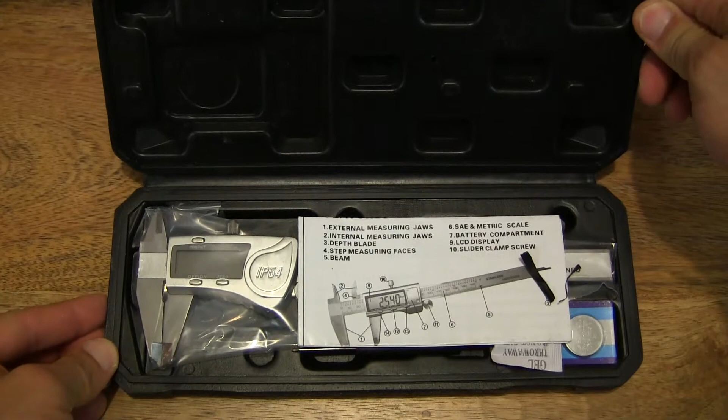So let's go ahead and open up the case. As you can see, the digital caliper comes in a hard carry case. Let's go ahead and open it up and remove the contents from the case.

Okay, so that's the contents of the case emptied out and laid out on the tabletop right here. So let's start off with this. There is a user manual for the Oria Digital Caliper.

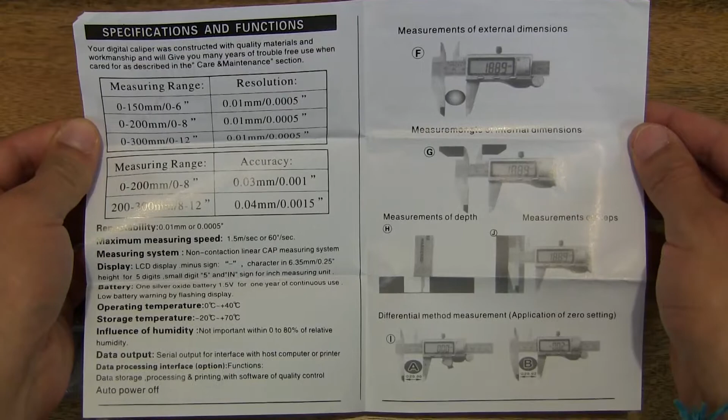Okay, we can now set the user manual to one side, and of course there is a packet of desiccant or silica gel to keep the contents dry. Make sure you put that away safely and keep that away from young children. And there is a packet of CR2032 battery to power the digital caliper, and there is a mini screwdriver as well with a Phillips head.

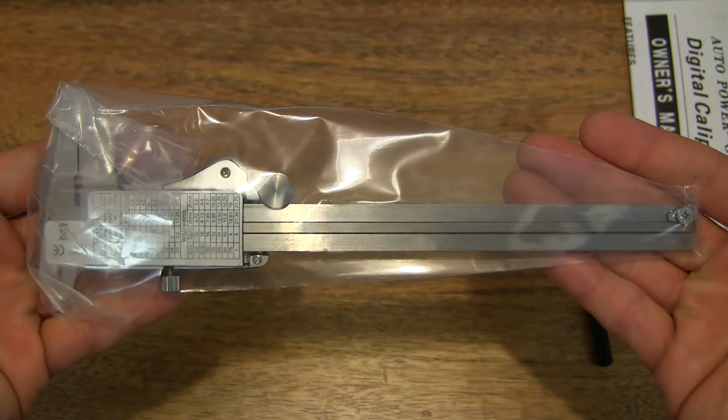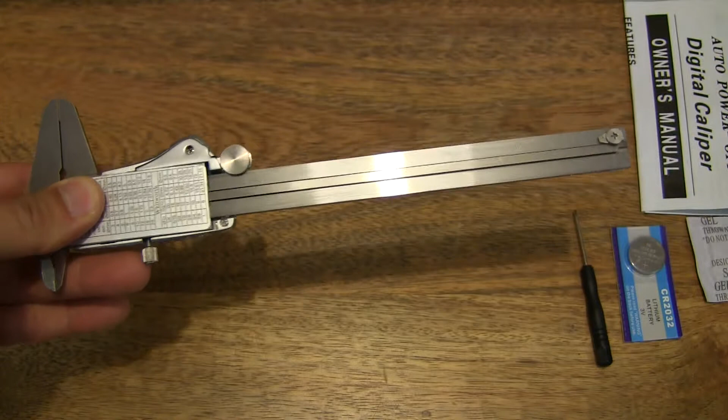Okay, let's set that down. And of course we do have the digital caliper itself, and it is quite a solid piece of equipment here. Let's go ahead and remove it from its protective plastic wrapper, and then we can take a close-up look at it.

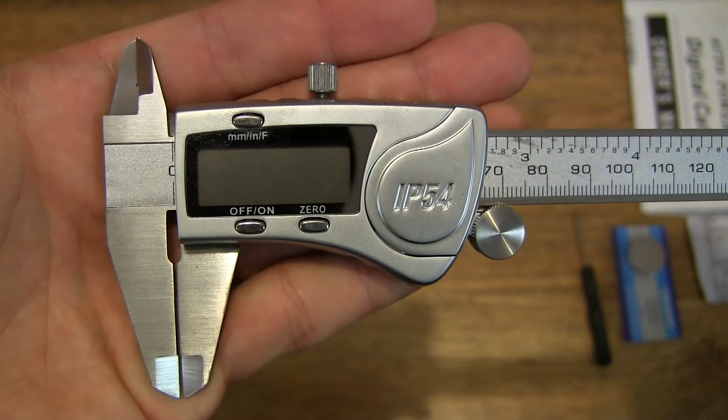So it does have a solid metal construction, nice and hefty, and there is an LCD, as you can see, and there are 3 push buttons on it. And it's nice to see that there is already a battery fitted into the unit.

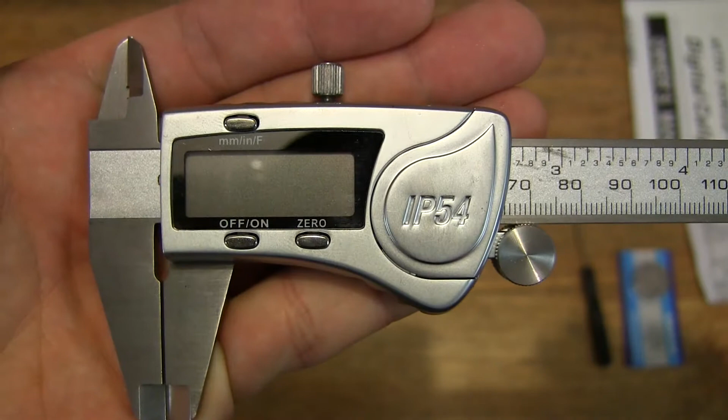So the battery that we saw is a backup or spare. So simple on off right there, zeroing, and the top toggles the measurement unit. So it does fractions in inches, millimeters, and inches.

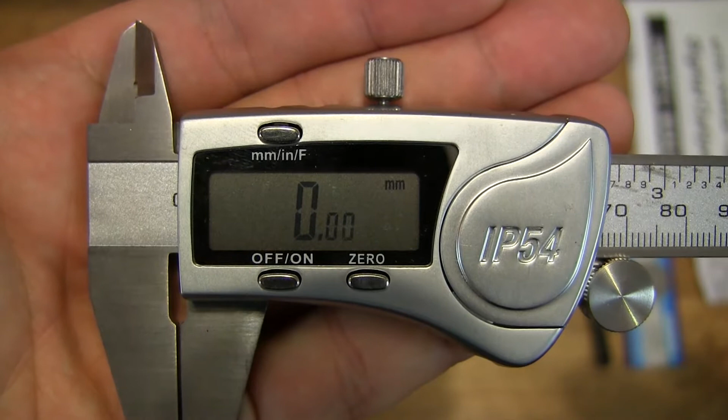Okay, let me bring it up closer so you might be able to see it a bit more clearly right there. So this is the millimeter measurement, inches, and fraction in inches.

Okay, so I've set it back to the millimeter measurement. And then just to show you the rest of the length of the digital caliper. So a nice clear display, easy to use buttons, on off, and of course zeroing.

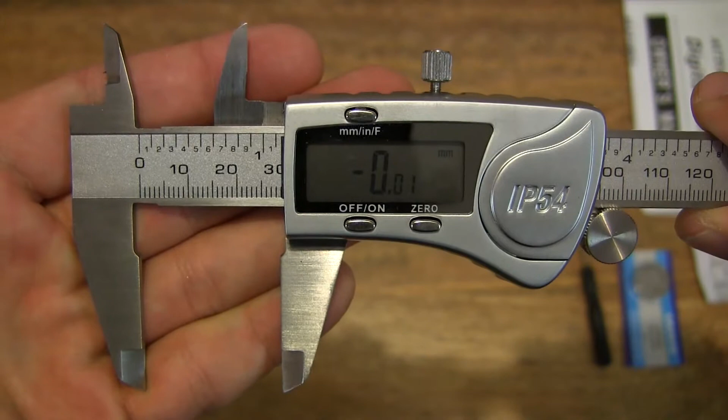Zeroing just resets basically the display, of course I have to undo the locking screw, making sure that it is released, and then we can reset the display at any point, which is quite good because you can always use it to measure differences as well in terms of width and thickness.

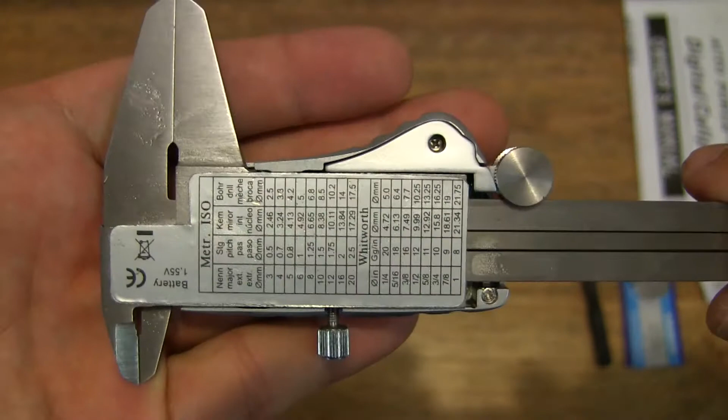But let's just do it the normal way for now. Set it all the way back and then zeroing the measurement. And on the reverse side of the digital scale or digital caliper, and of course over here, there is some more measurement information.

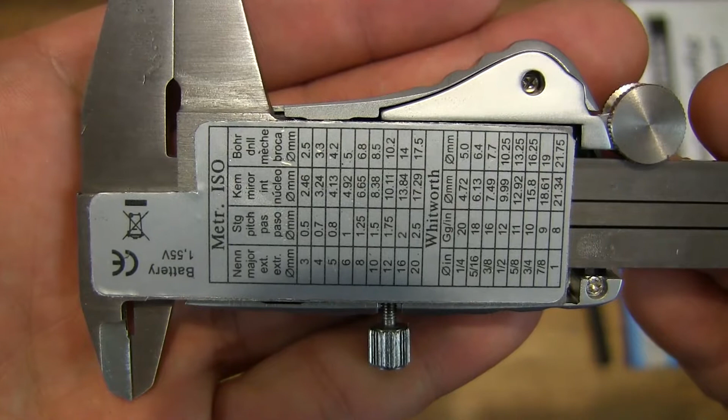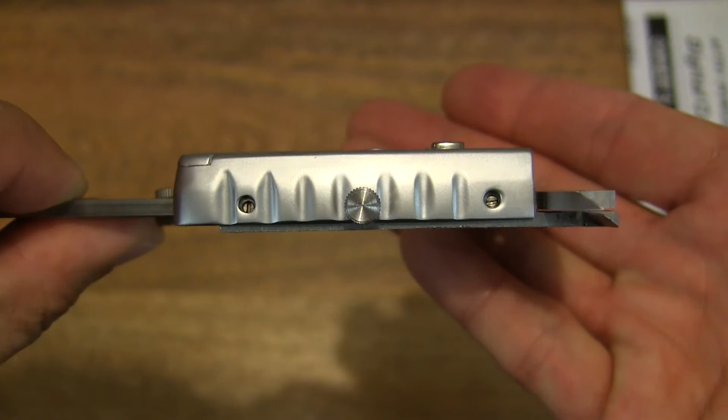And just to show you the thickness of the unit as well. So you can see it is very solid in construction, and it does have an IP rating stamped into the body of the digital caliper, IP54. So there is some level of waterproofing and dustproofing.

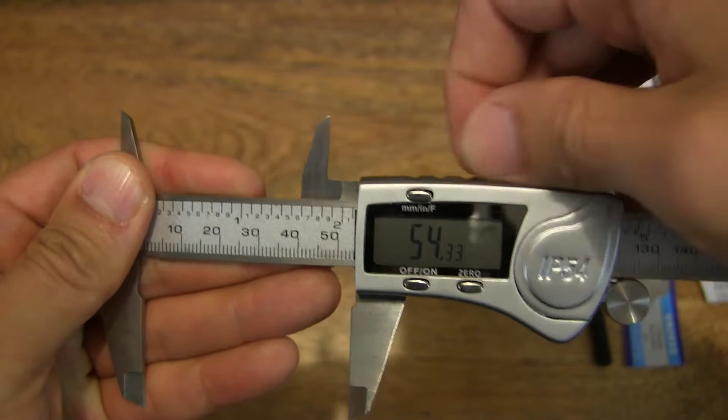And as I've shown you at the top, this is the locking screw or retaining screw or retaining thumb screw, just to fix the jaws or the position of your caliper so that it doesn't affect the reading that you've just taken. Okay, simple lock and release, clockwise and counterclockwise.

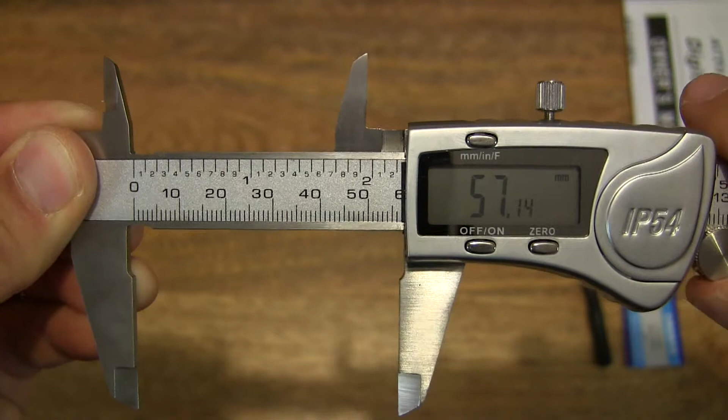And of course this wheel here is for very fine adjustments to move the caliper up or down the scale without having to do it the very kind of heavy-handed way. So yep, for very delicate adjustments right there.

And let's open it all the way out. So let's close it in, zero it, and then flip all the way out so it does lock at the end. No fear of it popping out of its ruler right there.

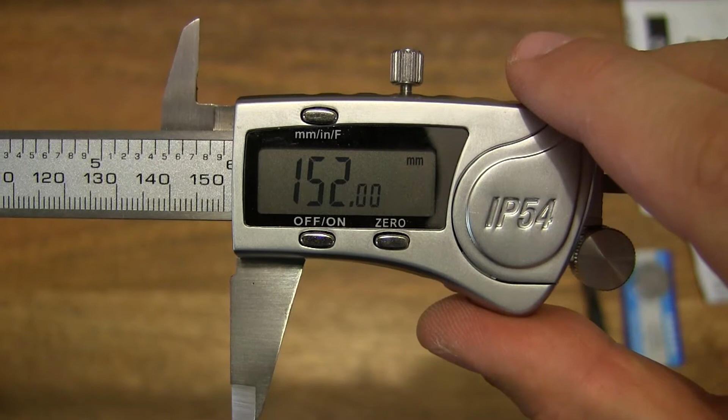And it displays 152 millimeters, and it measures down to the hundredths. So that's 15.2 centimeters in maximum measurement there.

Okay, so now I suppose let's go ahead and do some measurements. So I do have some items lying around, so let's go ahead and measure them. So here we have two notes, 15 pounds altogether, a 10-pound note, and the very newly issued 5-pound note, which is a plastic note that's replaced the paper note. So altogether, 15 pounds, and that's my whole life savings, so I have to be very careful with it.

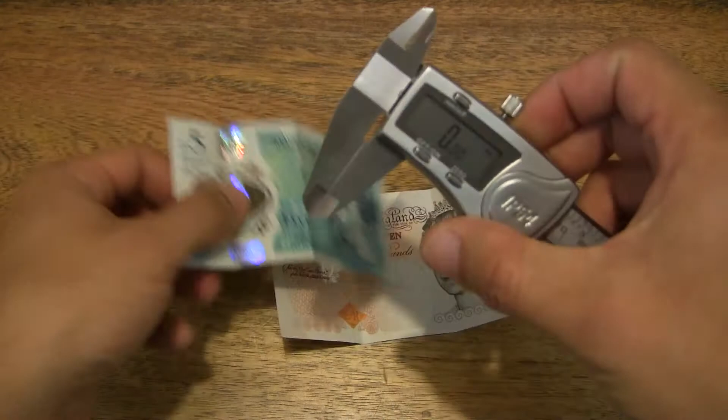So let's go ahead and see if we can measure the thickness of the notes. It's a big question mark, I'm not even sure, but let's give it a try. So it does measure the thickness. As you can see, it is 0.11 millimeters thick.

I've just pushed the wheel right up against the note, so it is at its maximum travel there against the note, and locking the thumb screw down right there sets the jaws in place, so no need to keep the hold on the wheel anymore.

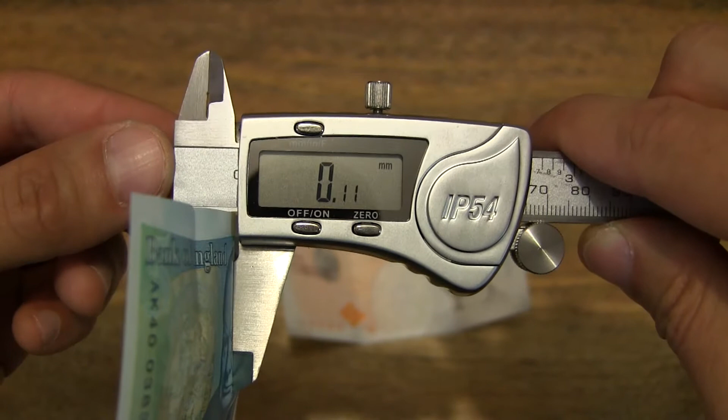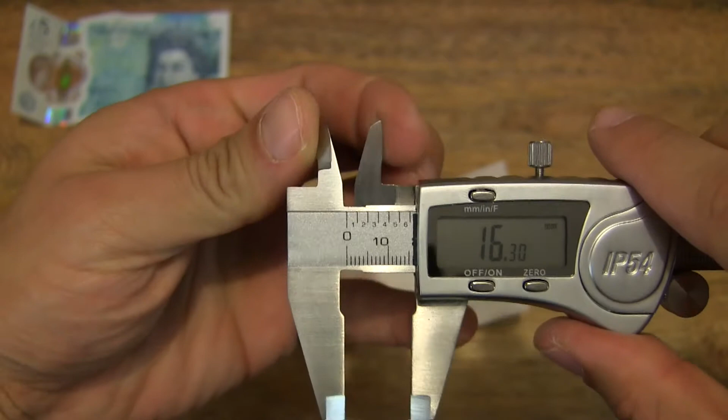Okay, so 0.11. Unfortunately, I don't have the old paper 5-pound note, so I can't compare the thickness, but let's go ahead and release the retaining screw or thumb screw and release the external jaws. And I have to mention, these are the external measurement jaws and those for internal widths or thickness measurements. So internal jaws and external jaws.

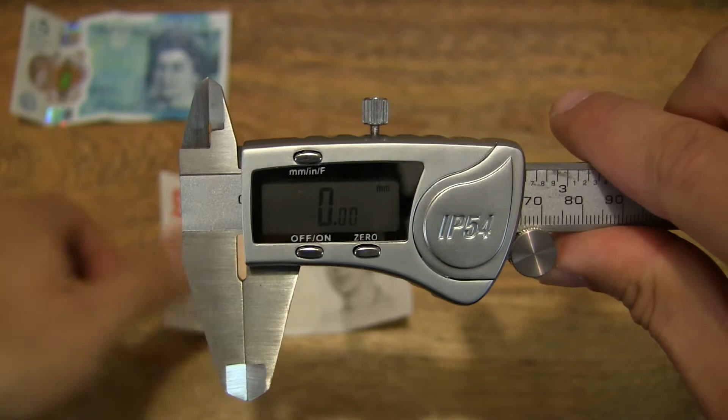Now let's go ahead and measure the 10-pound note, but before we do that, let's just make sure that it does show at 0 with the jaws fully closed. Now let's go ahead and open it up again. So 10-pound note, place it right there, and roll the wheel along. And as you can see, pushed right up against it, and with the same measurement as well.

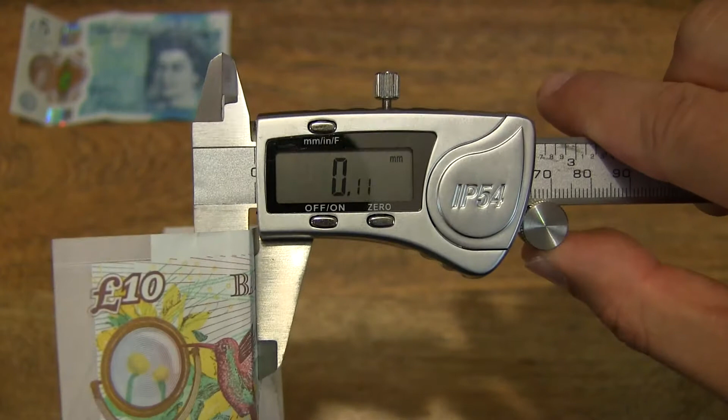So 0.11 millimeters thick.

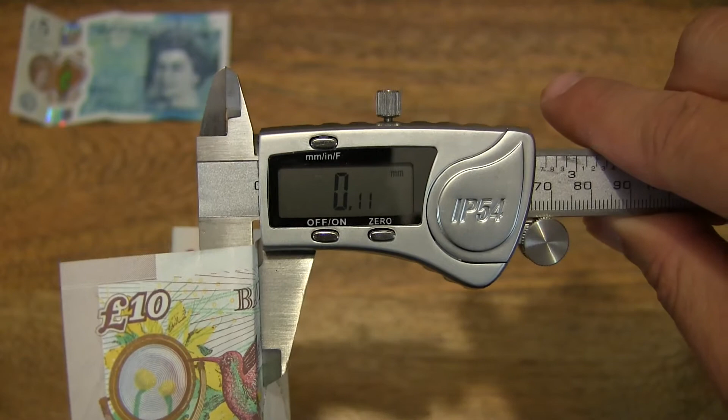Okay, very cool. Release and release. Now let's measure some other items very quickly. Over here I have a bunch of NATO and Zulu watch straps, and of course I have my trusty Tudor Submariner Snowflake MN Marine Nationale reference 7016/0.

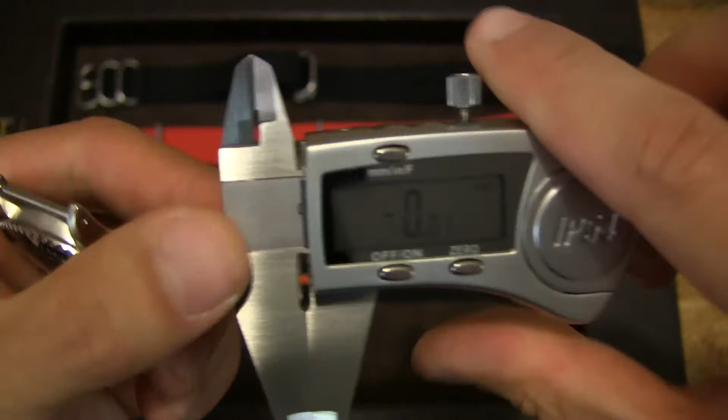With the digital caliper we can measure - let me just reset the measurement there. We can use the internal jaws at the top to measure the lug width between the lugs. So we simply make sure it is zeroed by pressing the zero button.

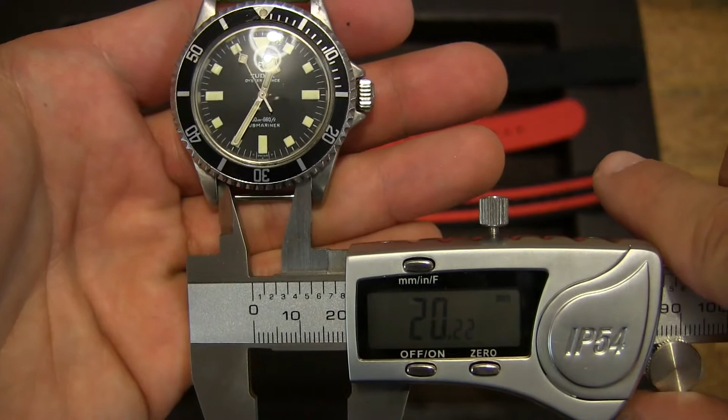Then we want to move it along just enough to measure the lug width between the lugs right there. I'm just going to rest it gently on the spring bar and then roll the wheel along, trying to keep the LCD in view at the same time. A bit of a juggling act for me, but just bear with me. I do have to be slightly delicate about this. Okay, and there we go. The measurement shows 20.22 millimeters.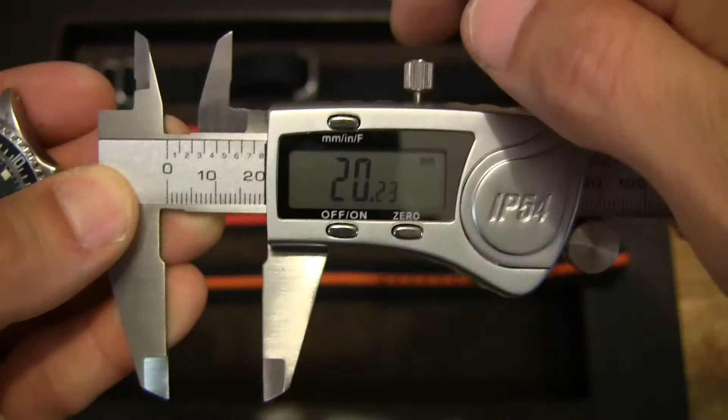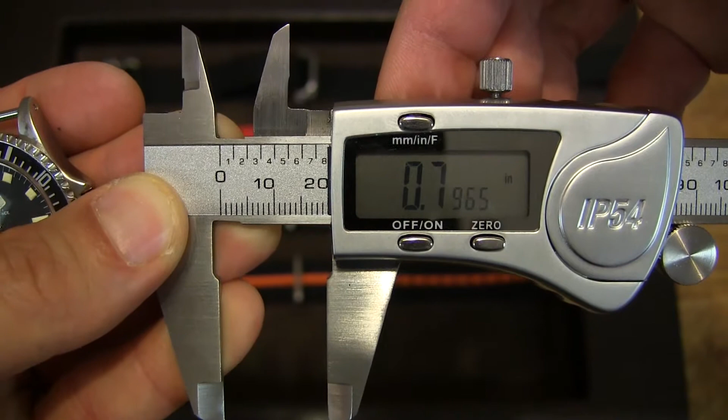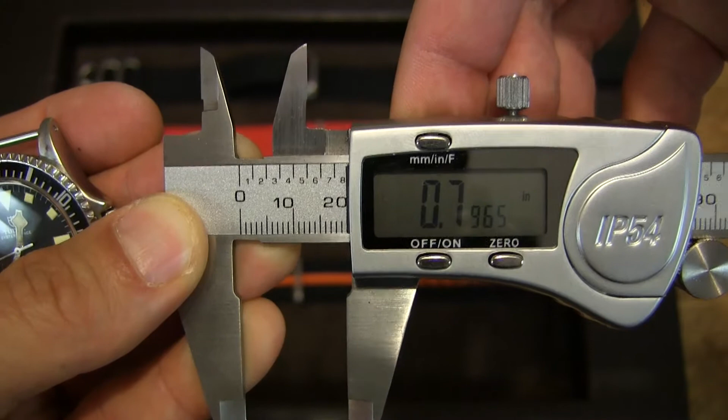If we need to change the measurement - of course I should have locked that down before, but that's just fine. If we need to toggle the measurement unit, just press the top button right there, and that toggles the different units: inches in fractions, back to millimeters, and then inches. So 3 different types of measurement units.

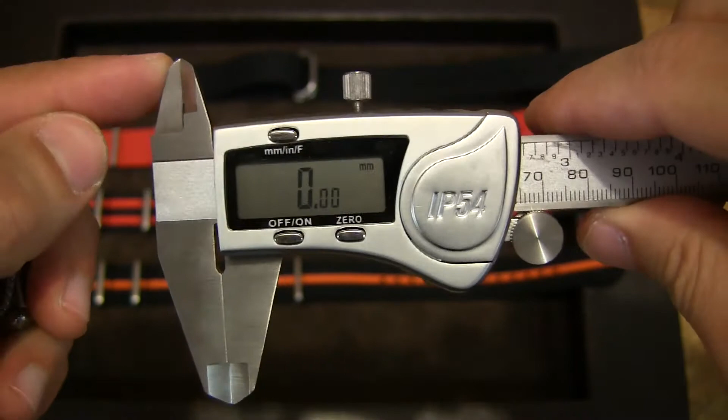Okay, so we've done that. What we can also do is measure the thickness. Let's go ahead and release the retaining screw, or locking screw. So we've just used the internal jaws to measure the lug width. Now let's go back to the external jaws - nice to see it's back to 0, fully closed. And what we can do now is measure the thickness of the case.

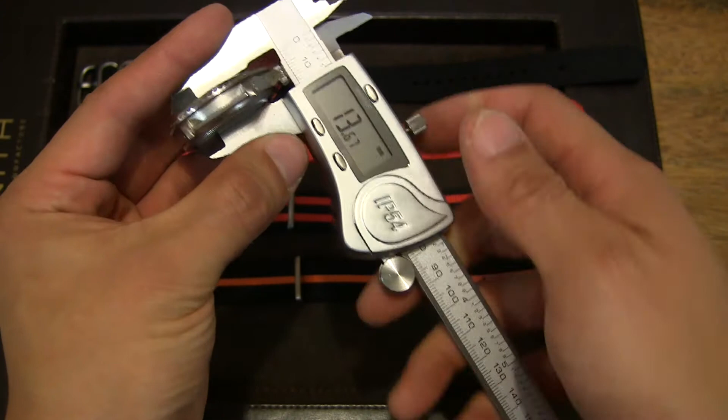So it is held pretty nicely right there. Lock it down. And there we go - that's the thickness of the case right there, the watch case, from the case back to the top of the plexiglass.

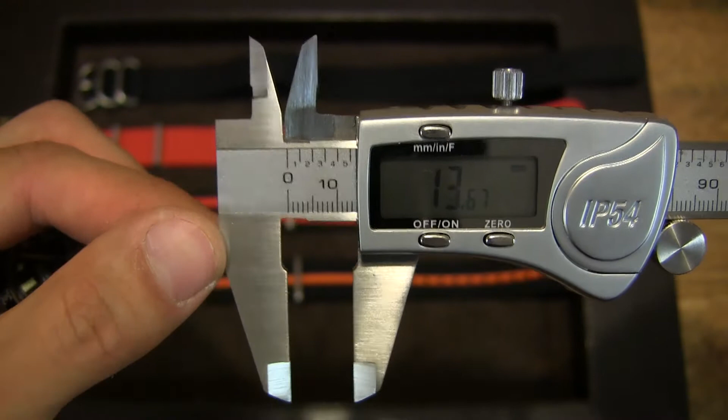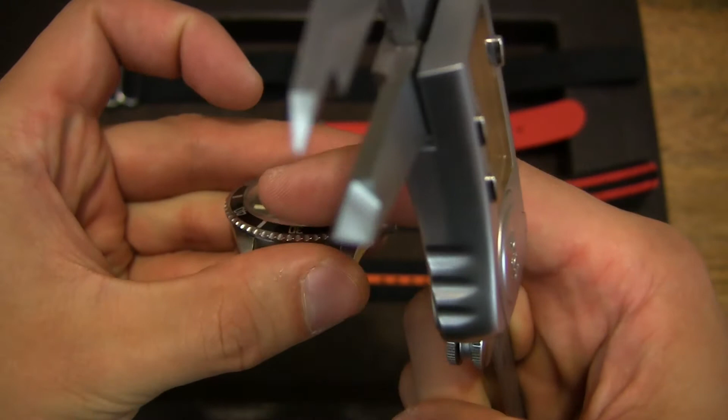And if we need to measure differences, let's say if we wanted to measure up to the bezel, or the thickness of the plexiglass from the height of the bezel, we could zero it from that point and then close it down up to the point of the bezel. So let's roll it right down if we can. Let's see, maybe do it this way so you can see more clearly. Oh, of course I need to release that locking screw.

So not quite the correct way of measuring, because I've noticed the jaws don't quite reach the case back doing it that way, but you get the idea that it is roughly 3.49 millimeters protruding of the bezel of the plexiglass. So the plexiglass does come out 3.5 millimeters from the surface of the watch's bezel. That's just a random data point or statistic there - not that it matters very much, but that's just a demonstration to show you what you can do by zeroing it at a different measuring point and then making a new measurement.

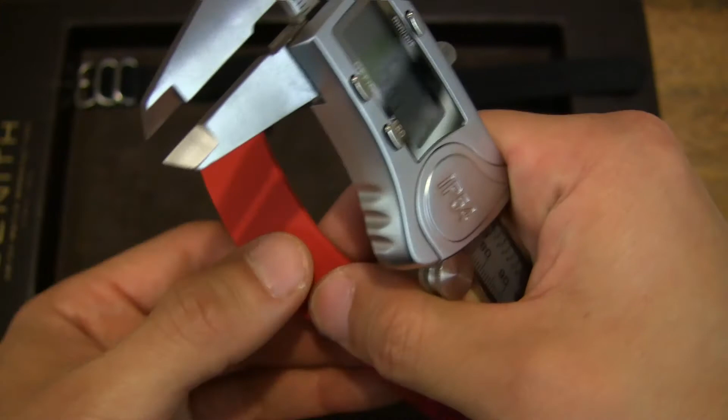And let's move on to the next strap. Okay, so this one is 1.2 millimeters thick. And moving on to the Italian rubber strap - it is 1.46 millimeters thick.

And lastly, the ballistic nylon strap, which is quite a thick nylon strap. Let's go ahead and close the jaws. And it's 1.46 millimeters thick. So there we go - 4 strap thickness measurements taken right there using the Oria Digital Caliper. And let's go ahead - okay, no need for that.